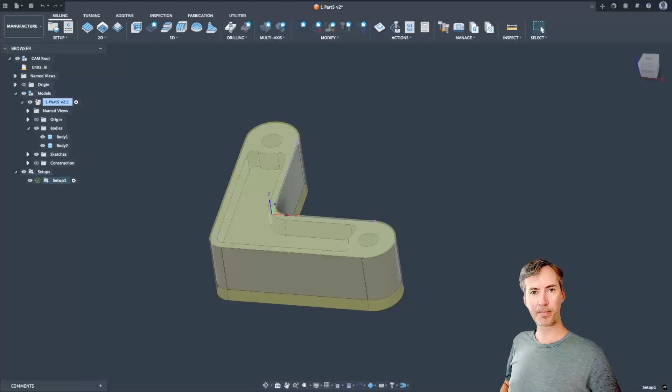Hey everyone, Alex from cnc-o-rama here, and today I want to talk to you about an issue that comes up when you're probing your stock, but your stock isn't a rectangular stock, it's from a solid.

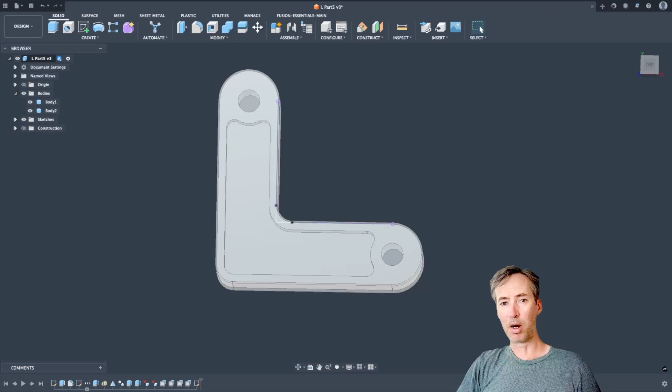So let me just go into this scenario a little bit. This part is, if we made this out of rectangular stock, there would be a bunch of material in the middle here to remove. So I had a similar part where I opted to have the stock water jet cut out before, which saved a lot of milling.

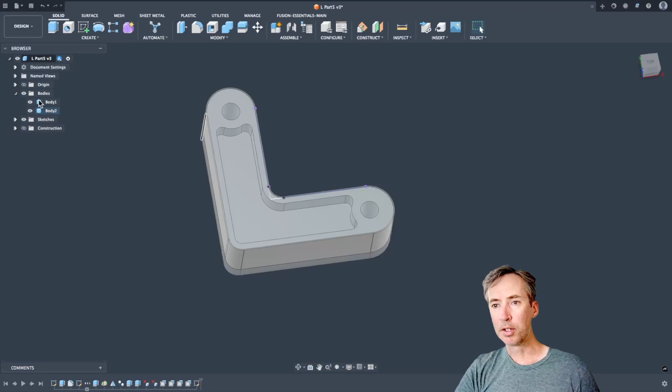And so to do that, I had to create a stock from a solid like this. So it's a little bit bigger than the actual part. And then the issue I ran into was when it came to probing the stock, it was not happy about that. So that's what I'm talking about here.

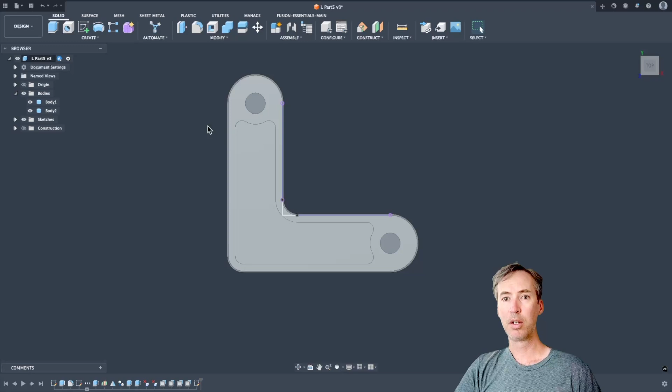So I have two bodies here. The second body is actually my stock model. And in my setup under stock, I picked that larger body as the stock.

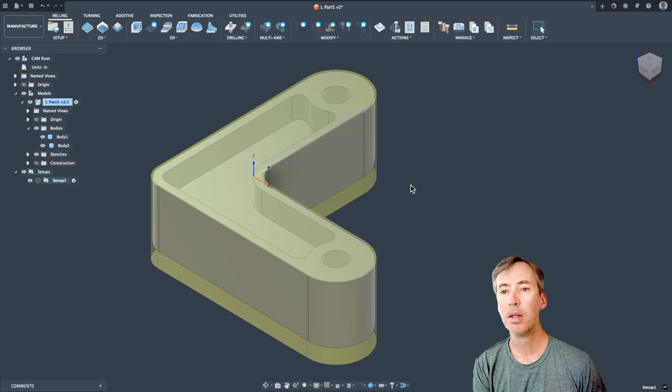All right, so I'm going to go create a probing routine. Let me select a tool. I'm just going to grab from the Fusion library a probe. Let me just grab this first one here.

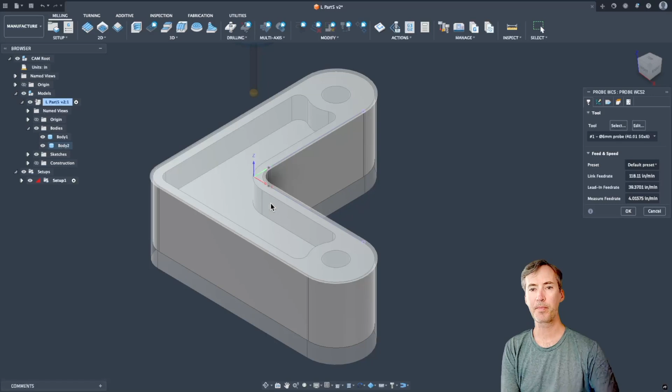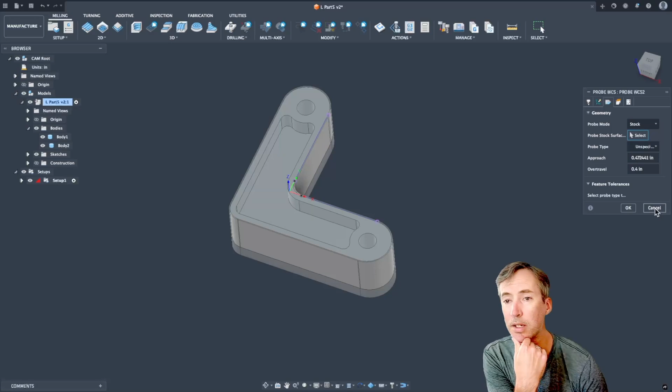So with these probes, you can probe stock generally, but in here, if I created this stock from a solid, it won't let me probe the stock. So there is a workaround for this. So instead of calling my body the model, I'm going to call my stock the model.

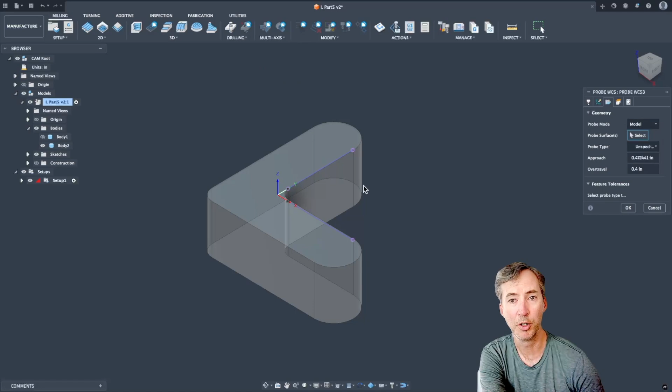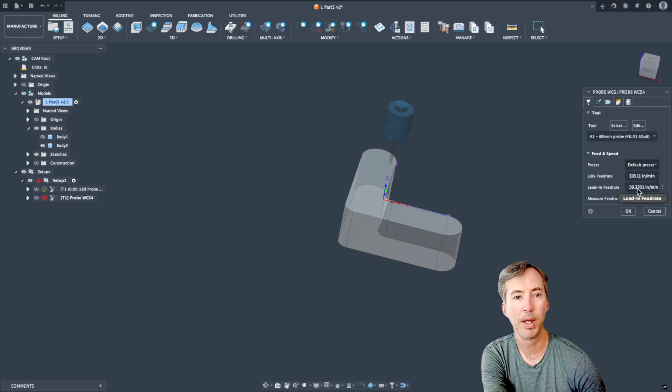And then if I do probing, for my geometry, I'm going to probe the model itself. So I'll do X probe there. Let's see, I can do another probing. And I'll do a Y probe between these two faces. So basically between these two, it's going to find my X and Y.

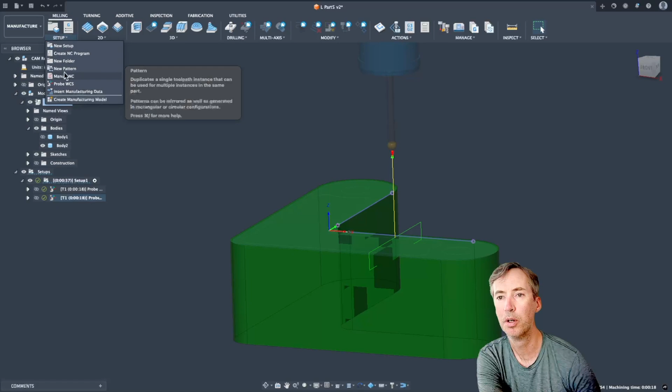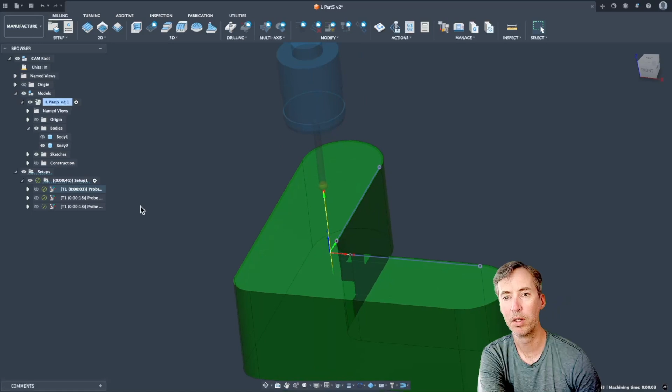I could also add a Z probe. And you can actually select where you want it to probe with this. And maybe I want that Z probe first. Yeah, Z, X, Y.

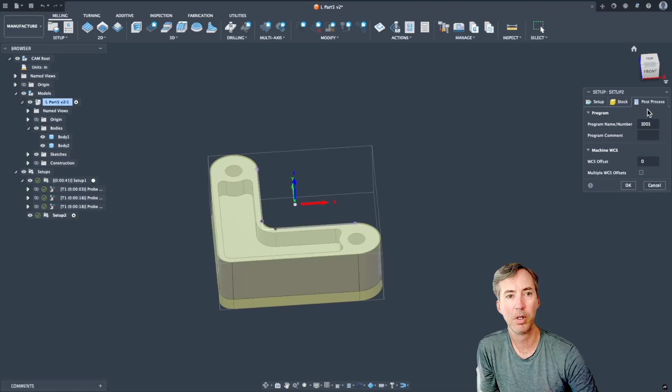And then what I'm going to do is just create a new setup, put all my toolpaths in there. So now my model is body 1, and my stock is from solid, and that's this body 2. And then I just want to make sure I'm using the same work offset. And the same origin. Let me pick that origin there.

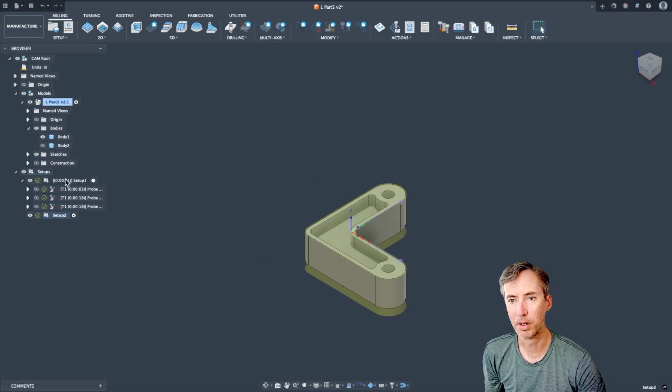All right, so I got two setups using the same origin, same work offset. And now I'll put my toolpaths under here to create this part. And then when I go to post the toolpaths, I'm going to post everything from setup 1 and everything from setup 2. And then that'll do my probing on the stock and then my toolpaths.

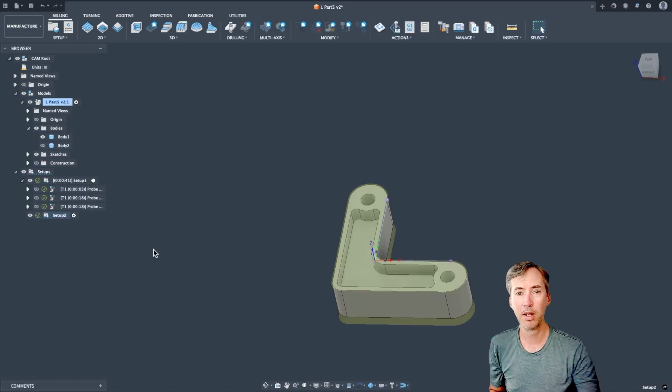And that's how you do that. So it's just basically a separate setup for your probing only versus your toolpath if you're using a solid model as your stock.